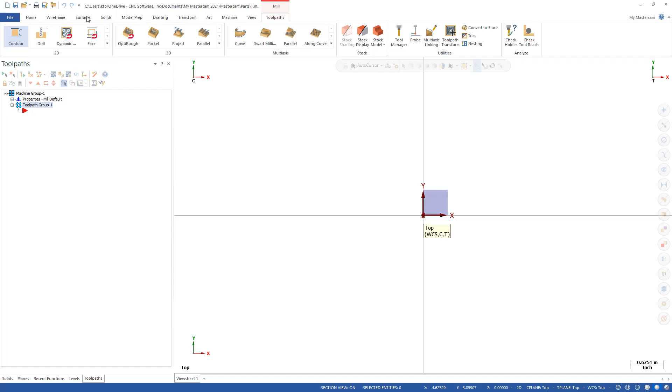I'm going to go up to Machine, and I'm just going to pick the default machine, called Mill Default. When you pick a machine inside Mastercam, it creates a copy of it, and that copy exists only in this current Mastercam file. So if I close this file, open a new file, and pick this machine again, it will be a different copy from what's in this current file.

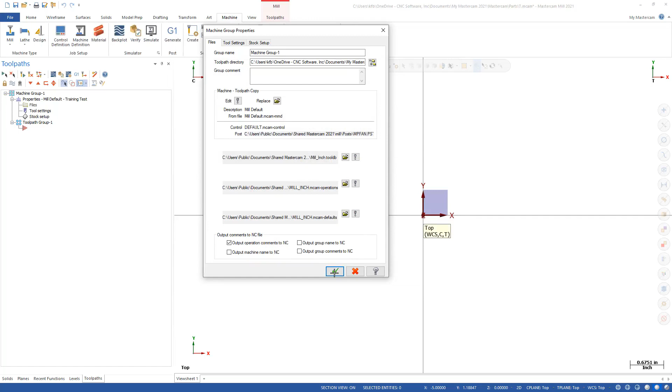As an example, if I go into this toolpath copy, you can see it says machine toolpath copy here, I can click edit. Let's just change this name, we'll call it training test. When I click OK, and then OK again, you'll notice the properties of this machine definition in the machine I selected now lists training test. However, if I go back to machine type, I still have the default one here.

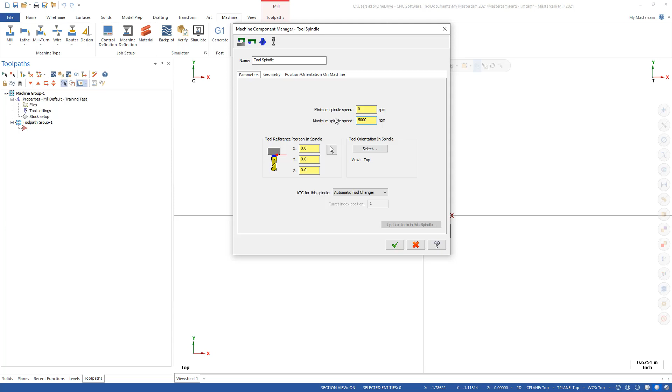So the changes made in the operations manager only apply to this particular file. As an example, if we go into the files and edit, drill down into the mill spindle group, all the way down to the spindle, and double click on it, you'll see I have a maximum spindle speed here. Let's say this is too high, and for this example we can only go a maximum of 5,000 RPM with this current machine. So when I click OK here, and click OK here, it all gets updated here.

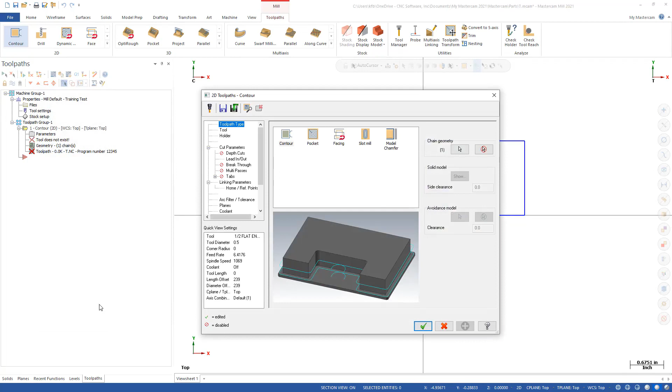Which is great, because now if I went in and created geometry, and then let's say I wanted to create a contour, you'll notice under the tool section I could pick a tool, and this can be any tool really. If I type in a spindle speed of something other than 5,000, let's just say 5,500, it will error out because my control definition is limited to 5,000 since I changed it. But the trick here is I changed it in my toolpath copy.

So if I go to File New and pick that same machine again, and then create another rectangle, and create another toolpath, you'll see here that I can change this to 5,500 without any issues. The reason is because when I went into the machine definition and changed the spindle speed, I changed it in the toolpath copy, and those changes do not change the default disk copy.

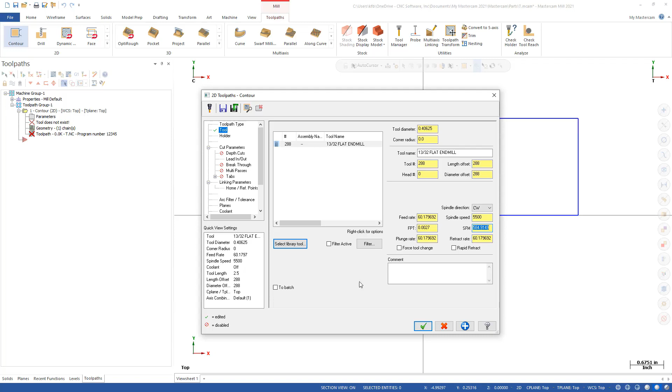However, an interesting concept to think about is if you wanted to adjust some of your parameters inside your machine definition file, you can do it at the local toolpath copy level. That way, if you make a mistake or a change you don't want, it only affects this particular file and not the default disk copy file.

To navigate to the disk copy, we'll go to Machine and select Control Definition or Machine Definition from the Job Setup group. Since I have a machine selected, this will open the disk copy of this machine definition. If I did not have a machine selected, it would prompt me to open one.

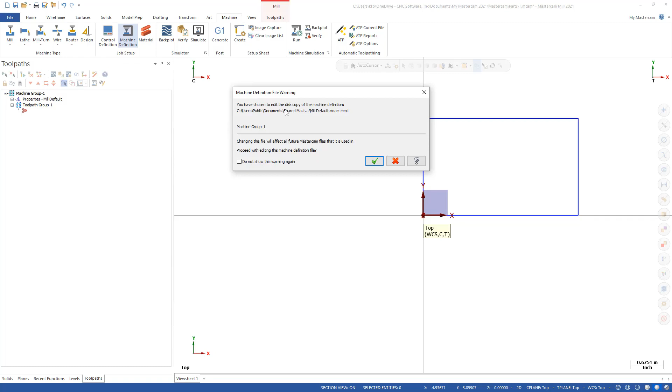So now I'm editing the disk copy, and if I make a change to the spindle group, and change this to 5,000 RPM, it's going to say you have made changes to the machine definition since the last time you saved it, save the changes to this file. I say yes.

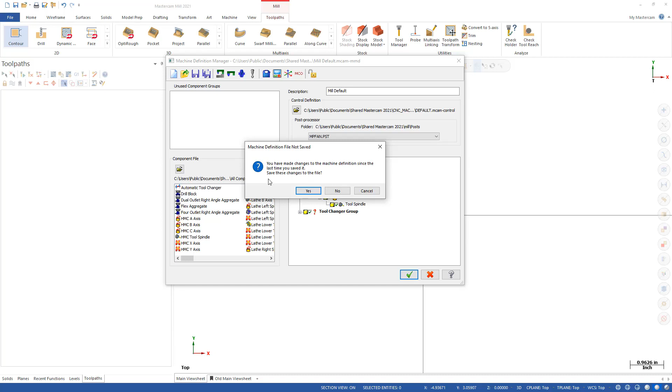Now I changed the machine definition for the disk copy, and it's asking me if I want to update my local toolpath copy with those changes. If I say yes, the change I made to the disk is now also in this toolpath copy.

Now that we understand the differences between the file copy and the disk copy, let's go into the machine definition so we can see some of the things that can be changed. For example, you have your machine configuration here, with a table group, a spindle group, and a tool changer group. Each one has a multitude of options you can add to it.

As an example, let's say you wanted to add an aggregate to the spindle. You can select an aggregate over here and drag it over, and now it will be added to your tool spindle. For each one of these, you can go in and set the values of your axes and other parameters, just like I did for the spindle you saw.

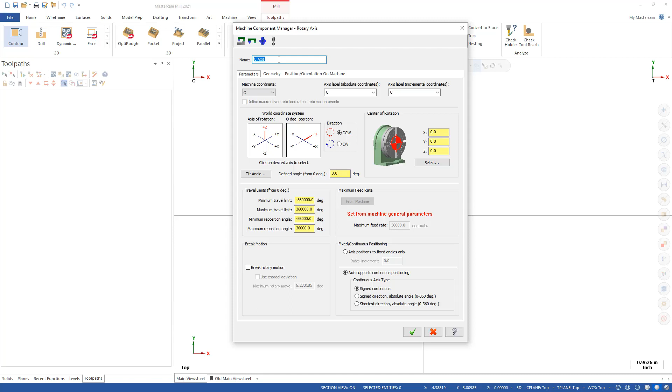As another example, for the tool changer, you can go in and tell it how many tools it holds. You can also go into the table group and look at various axes, and define the travel limits of these axes.

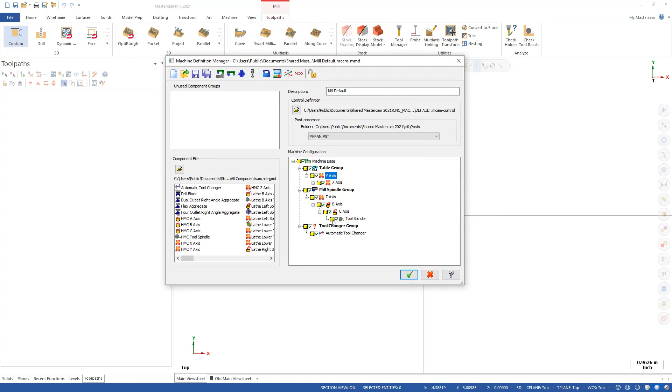From the machine definition, we can access the control definition. Inside the control definition, we have various options we can set that will change the output of your G-code.

For example, you can modify some of the tolerances or how we handle various arcs in the mill environment. For example, do we allow arcs in the XY plane, XZ plane, or YZ plane? How do we handle certain feed moves? All of these things can be set up inside of the control definition.

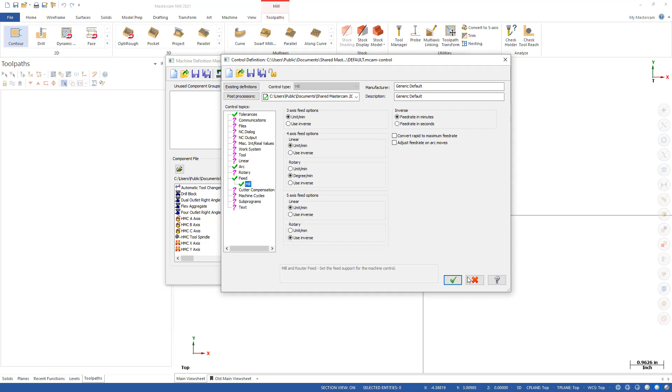Now notice there's one thing that's not here: the ability to choose operation defaults. We get to that area by accessing control definition directly from the machine group. So if I go to control definition, I'm accessing the disk copy of the control definition, and down here we have operation defaults.

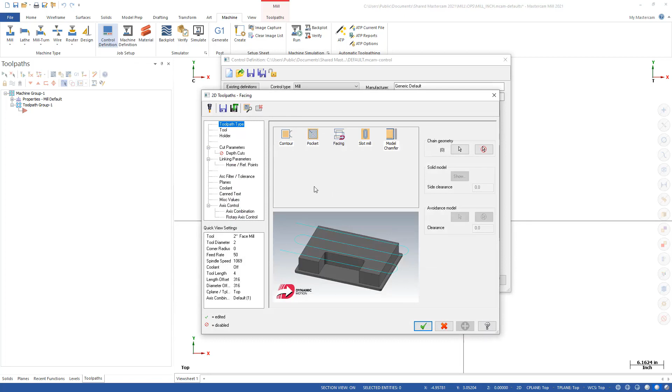For example, if you ever wondered why we have a few thousandths remaining on your facing operation as a default, that's because in the default settings for your 2D toolpaths, specifically under facing, you can go to parameters and see that we have a stock to leave on the floors. This is the default setting, so you can change this to 0, and then if you click OK and save this, your new default would now be 0.

In all of these toolpaths, you also have default tools set up. So let's say, as a silly example, you always use a 1/2 inch end mill for contouring. You could put that 1/2 inch end mill right in here, which ironically is what it is, and it would always use that by default, so you'd never have to pick that. But the lesson here is that every toolpath has a set of defaults, and those defaults are needed to create the toolpath unless you change it through the parameters.

If you find yourself doing a lot of heavy customization to the machine and control definition files, or if you wish to make changes to it, including the post, I would recommend contacting your reseller, as they may have some suggestions on how to do something specifically for your needs.

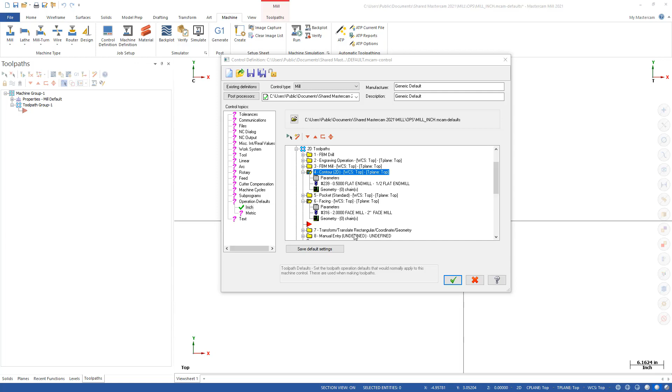But in any case, this is a brief overview of the machine and control definition files. Really the takeaway here is to understand that once you pick a machine and it's in your Mastercam file, you have a local or toolpath copy of that machine definition and control definition, separate from the one on disk. You can edit them both, but if you edit the toolpath copy, those changes only exist for that file. If you edit the disk copy, those changes are applied to any future toolpath programming when you select that machine definition file.